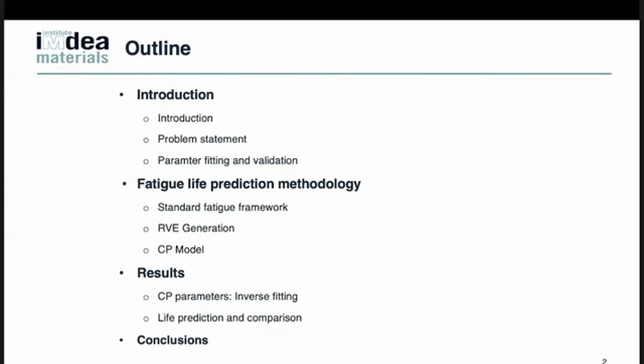So here, because this is not a platform to discuss the mathematical things, I will just brief you about the methodologies and how we are able to predict the additive manufactured fatigue life. So this is the outline. First is the introduction. Here I will introduce the topic and the problem statements, and secondly, I will brief you about the particular prediction methodology, and we will discuss one or two slides of results, and finally we will conclude.

So first, here we are discussing Hastelloy X. Hastelloy X is a solid solution strengthening alloy, which mostly preserves its strength around 1000 Kelvin. Due to this, it has nice resistance to oxidation, corrosion, and grain coarsening, that's why it's mostly used in jet engine tailpipes, afterburner components, turbine blades. So this is the nominal composition of Hastelloy X.

Due to the nice weldability and formability of Hastelloy X, and the recent development in additive manufacturing, industry has been using Hastelloy X as an additively manufactured one, but there are some problems: due to the layer by layer process and high cooling rate in the SLM melt pool, we get a different microstructure which is not similar to the wrought and cast materials. Typically, elongated grains are found in the build direction.

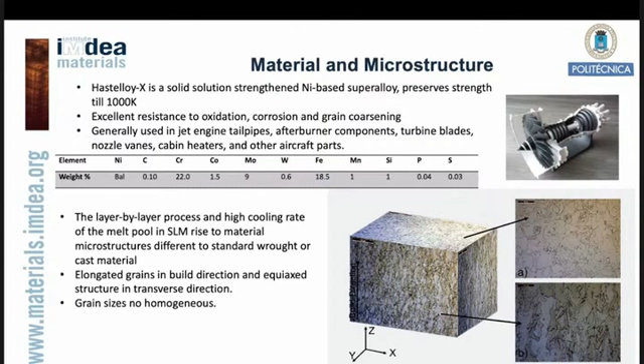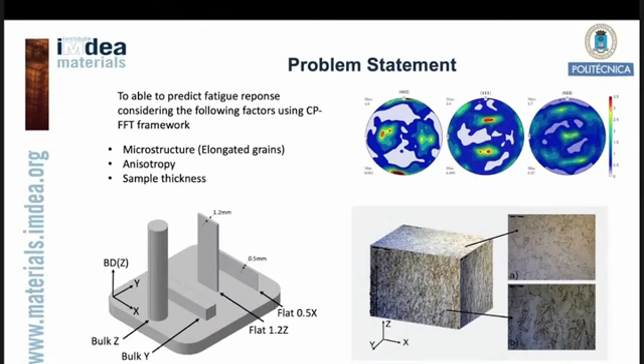If you see in the figure here, the first one, A, more or less shows an equiaxed grain structure, but in B you see more or less an elongated grain structure. This non-homogeneous grain size structure will lead to an anisotropic response, and it's detrimental to the fatigue life. So this is the problem statement: because some samples have different grain microstructures and anisotropy, we should have a model which is able to predict the fatigue response considering the CP-FFT framework.

Now we will discuss the fatigue life prediction methodology. So this is the standard framework model. Here I will go step by step. So first we will build an RVE. In an RVE, we include grain size, aspect ratio, all these things. Second, once we have the RVE, we will simulate with our crystal plasticity model and use CP-FFT homogenization, and then we predict the fatigue indicator parameters. Here we use energy based fatigue indicator parameters.

And once we have that, since fatigue is stochastic, we need several realizations of the RVE to take this probability into consideration. We will fit the Gumbel distribution. Then we make a link between the FIP that we have and the fatigue life, and then finally we predict the fatigue life.

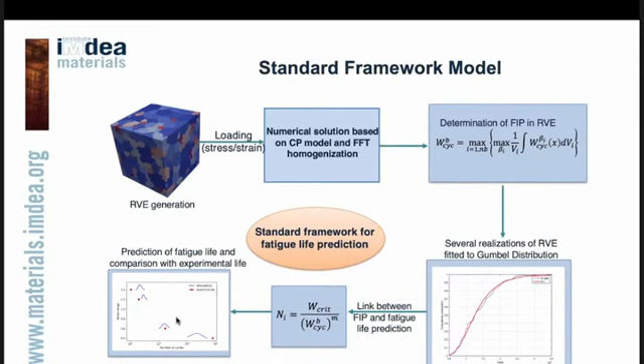Okay, then the first ingredient of our work is the RVE generation, which is the most important work. Since we have the EBSD, and as I said earlier, we have elongated grains in one section. So here let's say we have the EBSD. We extract three things from EBSD. One is the 2D grain size, second is the grain orientation, and third is the grain aspect ratio. Using MATLAB MTEX, we get the 2D grain size distribution. We generate the apparent 3D grain size distribution using Dream 3D or other tools, considering spherical grains.

And when we get the apparent 3D grain size distribution, using the weighted Voronoi tessellation for spherical equiaxed grains and log normal distributions of the grains, we are able to build an RVE which has spherical equiaxed grains. But in general, we need elongated grains, so we include an artificial aspect ratio of the grains as per the actual microstructure. And secondly, we use the orientation. Since the actual microstructure has millions of grains, we use Monte Carlo simulation to sample the orientation, and then we include it into the RVE.

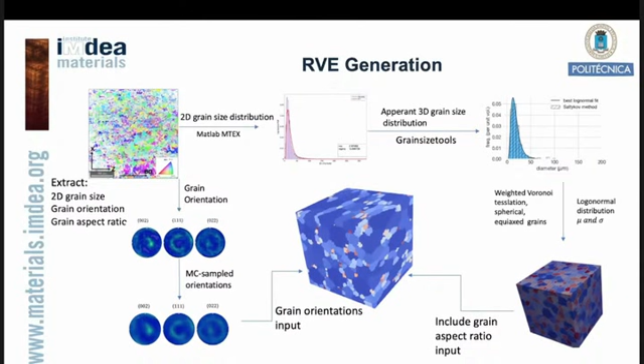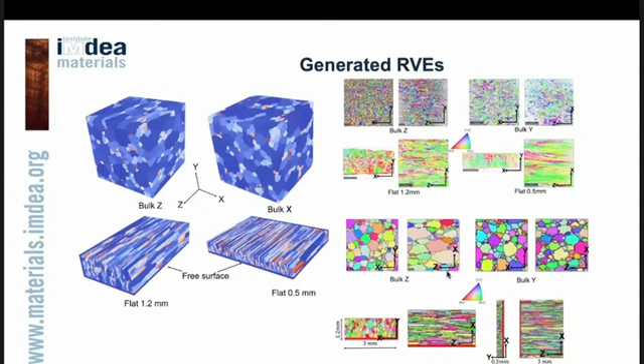So our RVE now is very similar to the actual microstructure, which we will use further. In our earlier work we built some RVEs for the additive manufactured sample, and you see there a lot of elongated grains, which is very similar to our actual EBSD test. So then I will quickly go to the crystal plasticity model.

The crystal plasticity model is the cyclic one. Equation one shows the resolved shear stress on any slip plane, and the plastic slip now includes the evolution of back stress, which is given in equation 3, and finally the strain hardening modulus is given by the Asaro-Needleman isotropic hardening. These are the parameters that we need to find using the inverse optimization approach, which we will discuss further.

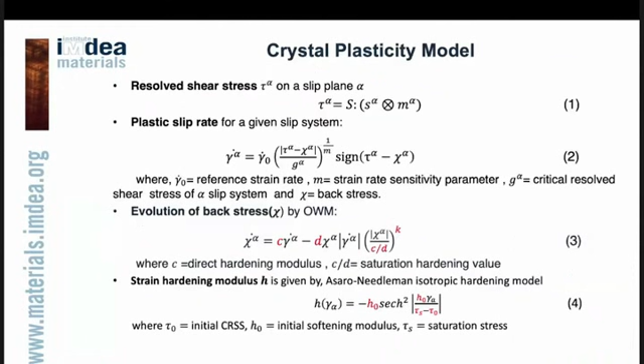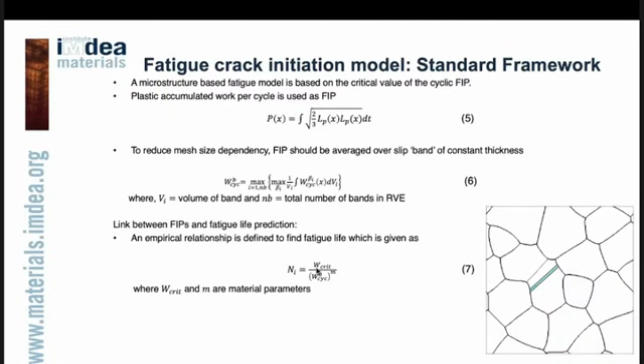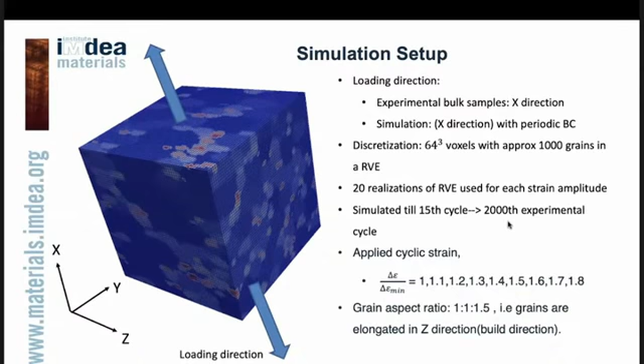Once we have the FIPs, we establish an empirical relationship between the FIP and the fatigue life through two parameters, the critical FIP and m, that we need to fit. Next is the simulation setup; again we use the RVE. We load in the X direction with different strains, normalized due to confidentiality, and 20 realizations of each RVE have been simulated. We made a trick that the 15th numerical cycle corresponds to the 2000th experimental cycle, so that we can easily jump to higher experimental cycles.

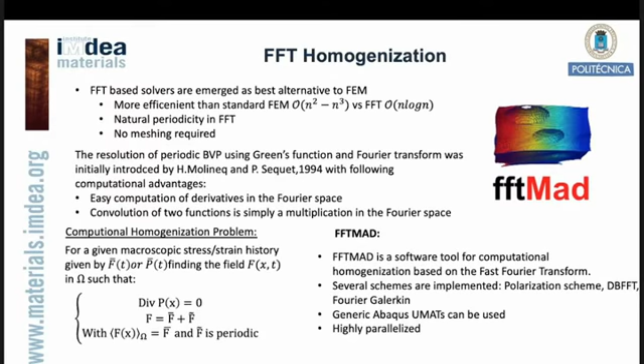Now we use FFT homogenization, since FEM has inherent limitations; it's not too efficient. That's why FFT comes into play: natural periodicity, and no meshing is required. This is not the platform to discuss the formulation, but the computational homogenization approach is something like this: we have the macroscopic stress and strain history, and we need to find the microscopic fields in our domain. To do that, the FFT-MAD software has been developed at IMDEA Materials, which has been used in this work. So finally, we go to the results.

First, the crystal plasticity inverse parameter fitting. We use the Levenberg-Marquardt least squares algorithm with the CPFFT approach, considering approximately 1000 grains loaded in the X direction. This is our curve fitting result. The red one is the actual experimental 2000th cycle, and the blue one is our simulated 15th cycle. We have a very nice fit, and these are the parameters that we fitted. Again, these parameters are normalized.

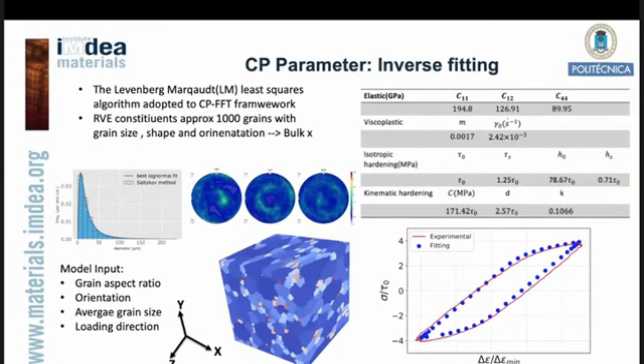Finally, yeah, the time is finished. Just a single minute, I'm just finishing now.

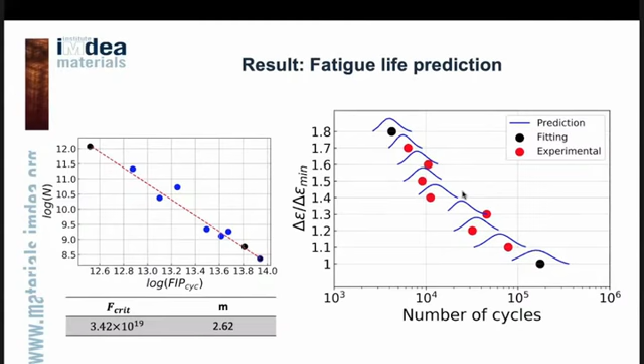So finally, with all this formulation on the right-hand side, we are able to predict the fatigue life within the given scatter, and we see we have quite an accurate fit. The conclusion is that for the SLM component, using the efficient CPFFT solver and homogenization, including actual grain size and actual texture, we are able to predict the fatigue life.